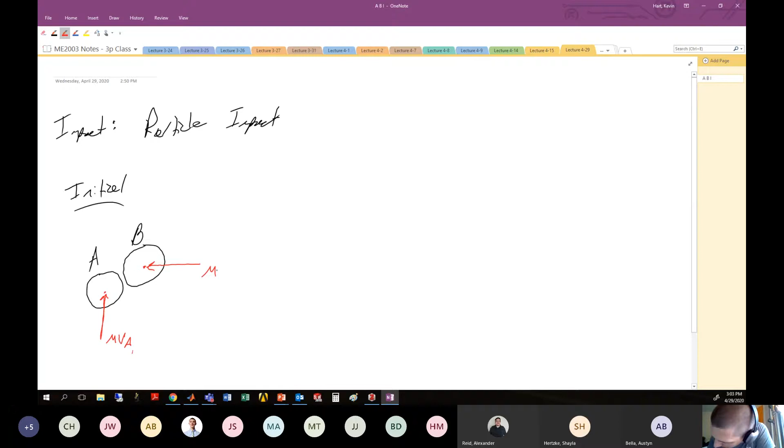Specifically, we were looking at particle impact to kind of motivate our discussion. And remember, the general setup was something like we had some initial conditions where puck A was hitting puck B. Here's puck A, here's puck B, and they're going to strike each other. Let's say this guy is moving here with M V B1, and this guy's moving here with something like M V A1. They're going to strike each other.

We had some definitions for some vocabulary that we're going to use to describe this impact, namely that we have this normal to the point of impact here, which we call the line of impact, or LOI for short. And then 90 degrees from that, we had this other direction, which is the tangential direction, sometimes given little t. We define some unit vectors along that general direction. So if the point of impact is right there at that heavy dot, then we have a unit vector along the normal direction, which is E hat n, and a unit vector along the tangential direction, which is E hat t.

All right, so this is some general definitions of what's happening when these two objects are about to collide. Then we have some impulses which occur. If we're looking at the system as a whole, so puck A and puck B, then we're not going to see any external forces, because whatever forces are transferred between the two pucks at this point of impact is going to be internal to the system. So you see nothing, nothing.

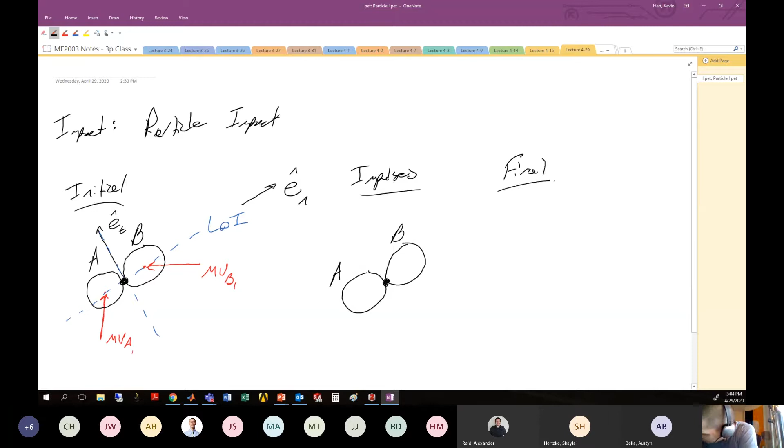And then your final momentum is they've struck each other, and now they're moving away. They had a brief stint, a brief relationship, short and fleeting, where now they've rebounded off each other and have some new momentum terms. So here this is something like M V A2. And after this guy strikes, maybe this guy is moving now this direction with something like M V B2 after it's struck that particular guy.

All right, so we talked about this general situation, and this looks a lot like an impulse momentum diagram. We used this impulse momentum diagram to look at conservation of momentum in the E hat T and the E hat N directions. When we did that, we came up with 4 different equations.

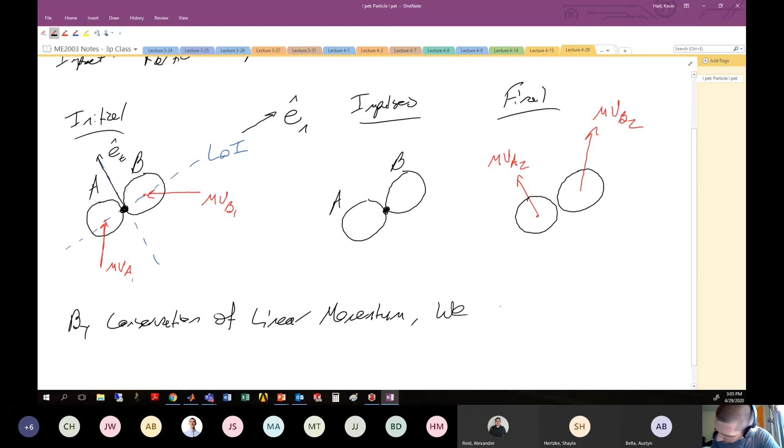So, by conservation of linear momentum, we saw mathematically we had these 4 equations which end up being important for us: that the velocity of puck A, state number 1, specifically in the tangential direction, is conserved. So whatever it is coming in, tangential direction, it's the same coming out. This was for us equation number 1.

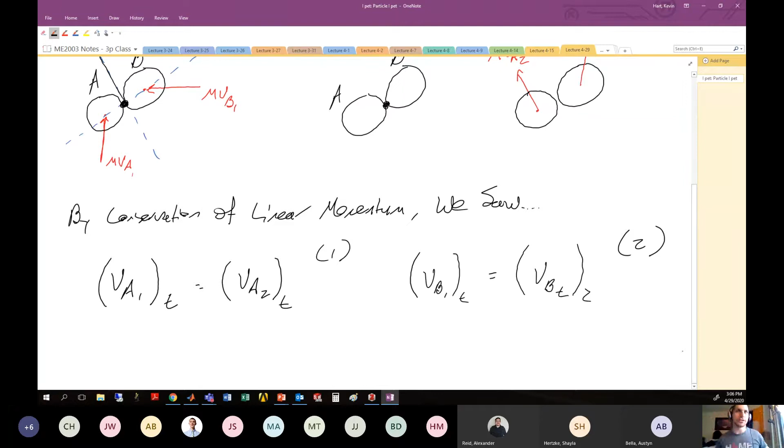Same thing with the velocity of puck B, state number 1, tangential direction. Whatever it is in the tangential direction going in has to be the same in the tangential direction going out. This here was equation number 2. This comes from conservation of momentum of each individual particle in the tangential direction, since the impulses on these particles are only in the normal direction, the tangential momentum must be conserved.

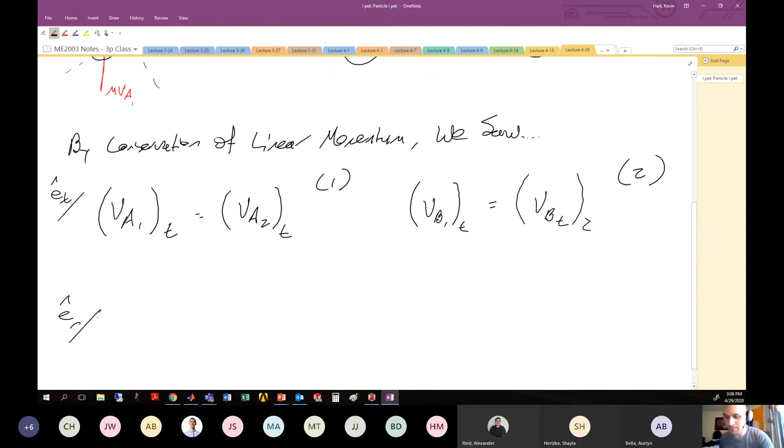So this is specifically conservation of momentum in the normal (E hat N) direction. For E hat N, we looked at the system as a whole and said that the system in the normal direction must conserve momentum. That led us to the following equation: the mass of puck A times the velocity of puck A, state 1, plus the mass of puck B times the velocity of puck B, state 1, equals the mass of puck A times the velocity of puck A in state 2, plus the mass of puck B times the velocity of puck B, state 2. All of this in the normal direction.

That's a funky looking M, looks like a drunken M. Okay, that's a little better. So this was equation 3 for us. And then the fourth comes from conservation of energy.

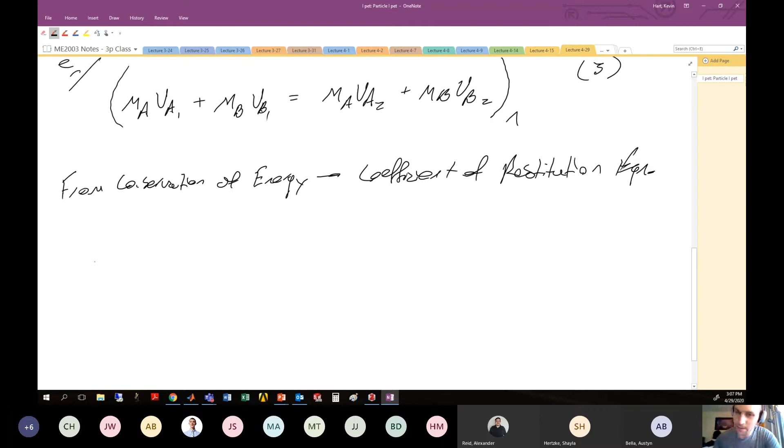We have the coefficient of restitution equation, and for coefficient of restitution we use the variable little e. We write the equation so that the velocity of puck B, state 2, in the normal direction, minus the velocity of puck A, state 2, in the normal direction, is equal to the coefficient of restitution times the velocity of A, state 1, normal direction, minus the velocity of B, state 1, normal direction. This is equation number 4, and it comes from conservation of energy. We know that this coefficient of restitution e ranges in value from 0 to 1.

Okay, and these four equations were specifically for particle motion with oblique central impact.

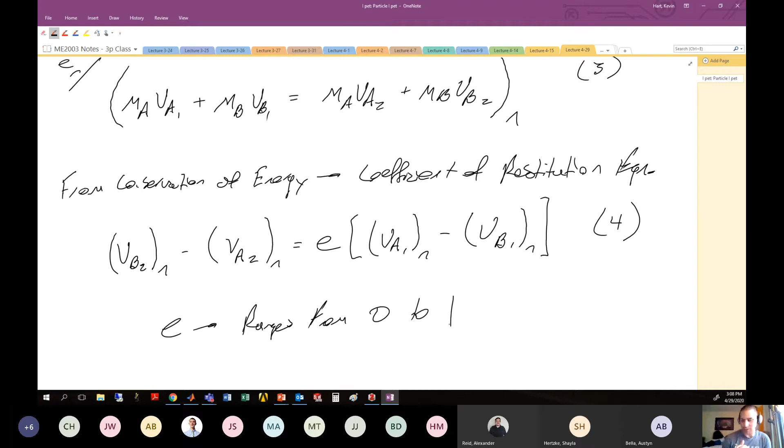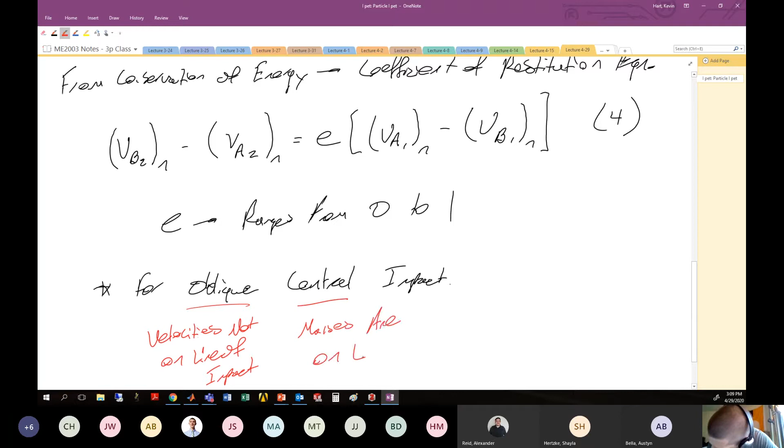And we made some definitions for what it means to be an oblique impact: that is, the velocity is not on the line of impact. And central means that the masses are on the line of impact. So when we talk about particle collisions, which is what we just drew, the masses are always on the line of impact because the mass is this tiny infinitesimal piece. So the mass must always be at the line of impact because it's the center of gravity - there's nowhere else for the mass to possibly be.

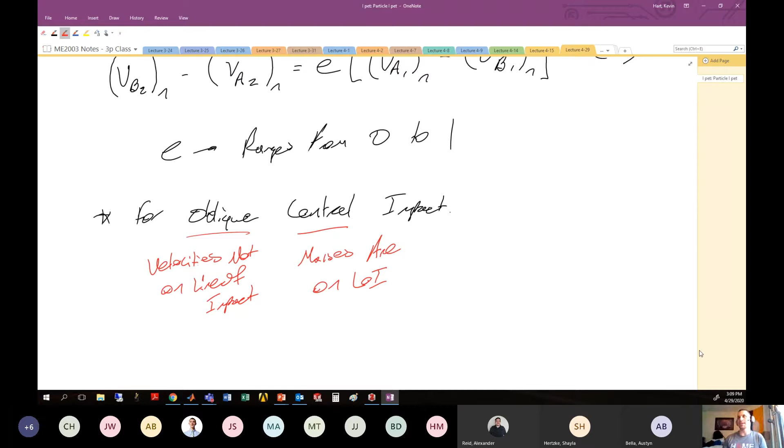Oblique impact is, again, when the velocity is not necessarily in the line of impact, which we drew in this figure here. We see that this particular velocity is not on the line of impact. So this is an oblique impact.

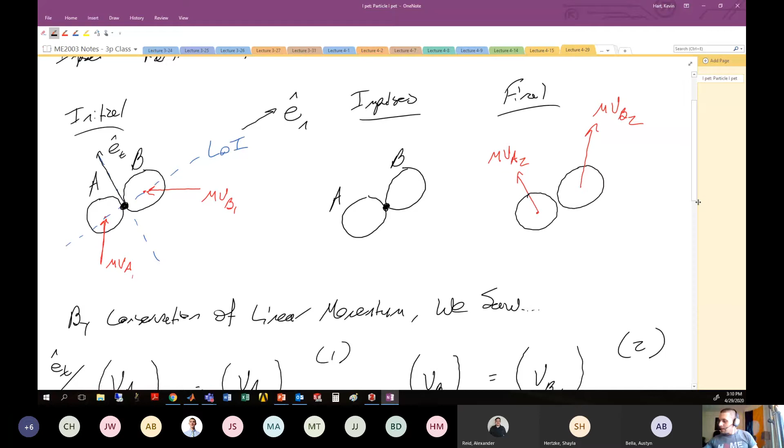Now, that's all good and great. What do we do when we have to go to rigid bodies? Well, again, with rigid bodies you're not always going to have this central impact - you're going to possibly have eccentric impact, and I'd say most of the time you have eccentric impact. So we have to deal with that.

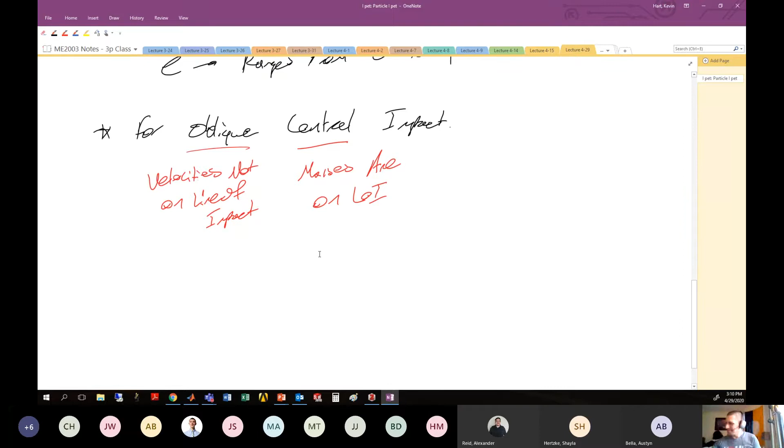All right, can you deal with that? Okay, anybody know the movie? If you know the movie, I'll be very impressed. Can you deal with that? Okay, 10 million bonus points of nothingness to whoever knows that movie quote. Can you deal with that?

All right, we have to deal with moving from particle interactions to rigid body interactions. So now let's investigate rigid body collisions with eccentric impact. Looks like somebody has a guess.

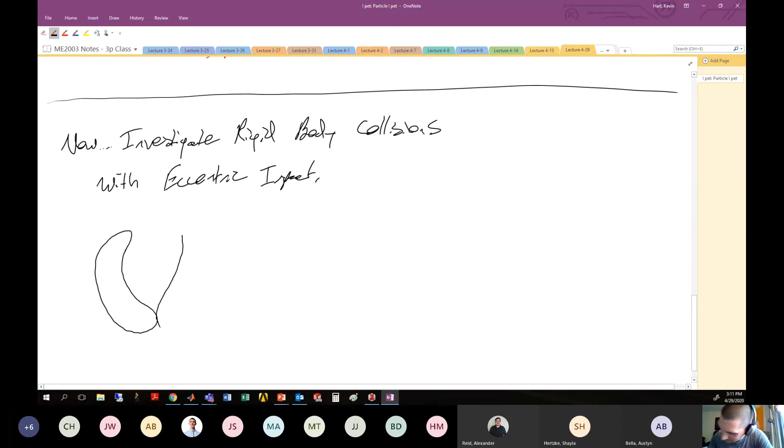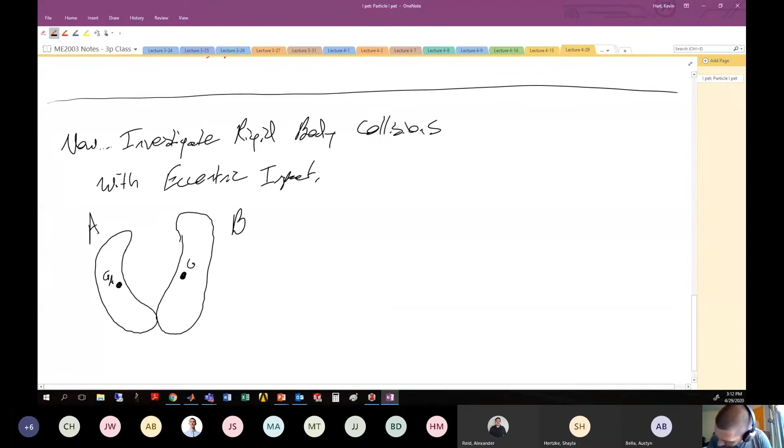All right, so we're going to investigate rigid body collisions with eccentric impact. What we should have in mind is some rigid bodies with some random generic shape. Let's say we have a peanut-shaped rigid body, maybe it looks like that, and it's going to collide with some other peanut-shaped rigid body that looks something like this. So here's rigid body A, here's rigid body B. This guy has a center of gravity - it's probably not going to be there, the center of gravity might be something more along the lines of there. And here's the center of gravity of B. So let's call this GA, and we'll call this GB. They're going to collide down here at some point that we'll note, and we'll call this point D.

So two bodies, A and B, colliding at D with eccentric impact.

All right, so it's eccentric because the centers of masses of those individual objects are not along the line of impact. So if these guys are going to collide and hit each other, remember the line of impact is like normal to that collision site. So the line of impact here is something like this. Notice that the center of gravity of each of those objects is not necessarily on that line of impact. So we got issues.

And just, I'm talking dynamic issues here. We all have our own issues. Okay, come on, I'm going crazy here, so obviously I have issues.

All right, so the collision has got this line of impact, and we see that neither of the centers of gravity are along that line of impact. So when they strike each other, you're going to impart motion in this angular sense because there's going to be resulting velocities at the line of impact after the collision, and they're not necessarily at the center of gravity. So you're going to impart rotation to each one of these objects, and that kind of complicates the matter.

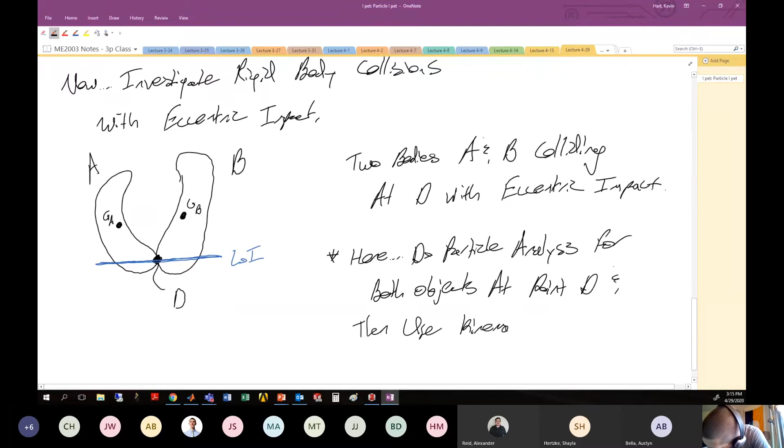So the way we deal with eccentric impact is: here, we do particle analysis for both objects at point D, and then use kinematics to determine other velocities on the body, including potential angular velocities. So velocities here, I'm including both linear and angular components.

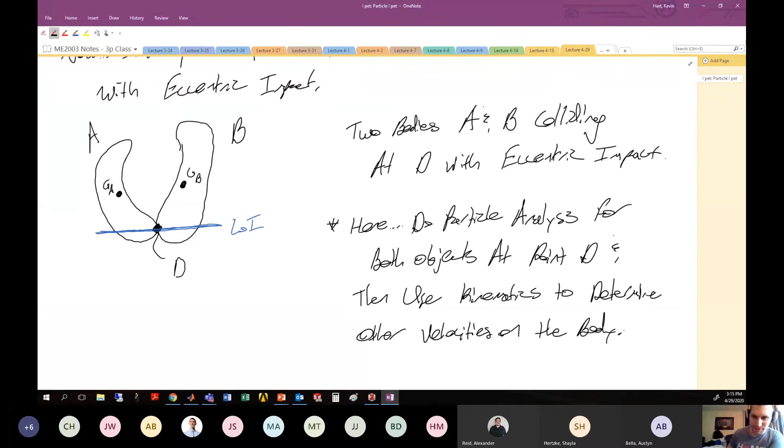All right, can you deal with that? So enough jibber jabber, enough yakety yak. Let's do it. Let's do an example problem. Yakety yak, don't talk back. So let's look at an example problem.

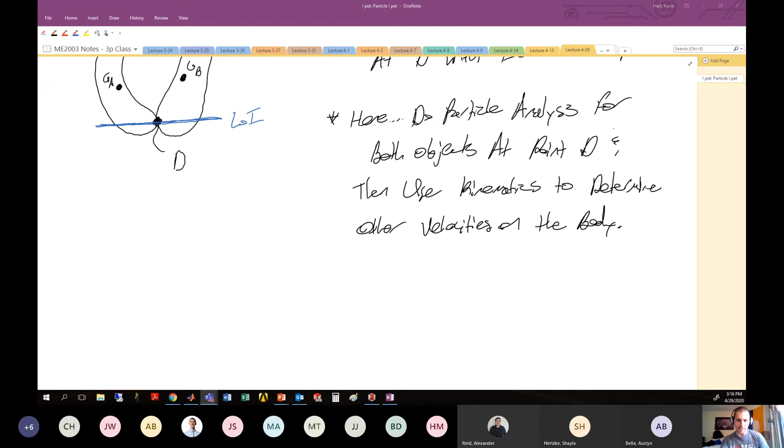This example problem is very similar to problem number 4 that you have on your homework. Except here we're sort of vertical instead of horizontal, and we've got a different location for the pin. But the general idea is the same.

A 2 kilogram sphere moves to the right at 5 meters per second, and it strikes the bottom end of this rod, which has a mass of 8 kilograms, and the coefficient of restitution between the sphere and the rod is 0.8. We want to determine the angular velocity of the rod and the velocity of the sphere immediately after this impact has occurred. This is an eccentric impact because the center of gravity of the sphere and the center of gravity of the rod are not both along the line of impact. So there's going to be resulting angular velocities. We have to figure out what that is, and resulting post velocity of the sphere, which is going to be different than the velocity of the rod where the sphere strikes it. So let's look at this example.

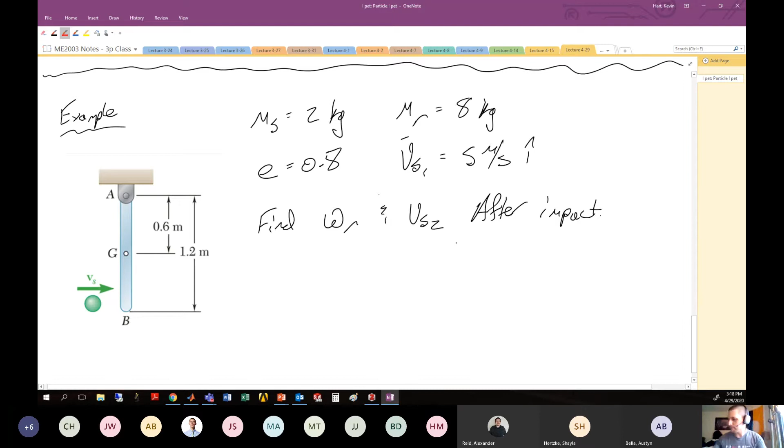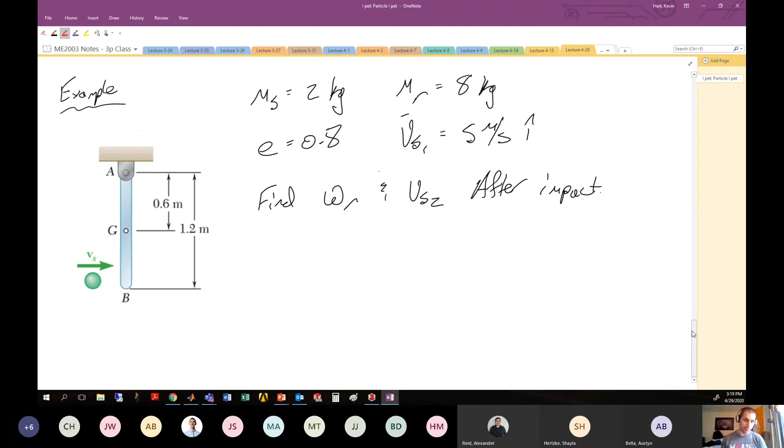So this is a conservation of momentum problem. And with conservation of momentum problems, we're going to attack them by doing conservation of momentum of our particular problem with our sort of momentum diagrams. So we will do an initial momentum. We're going to have some impact or some impulses.

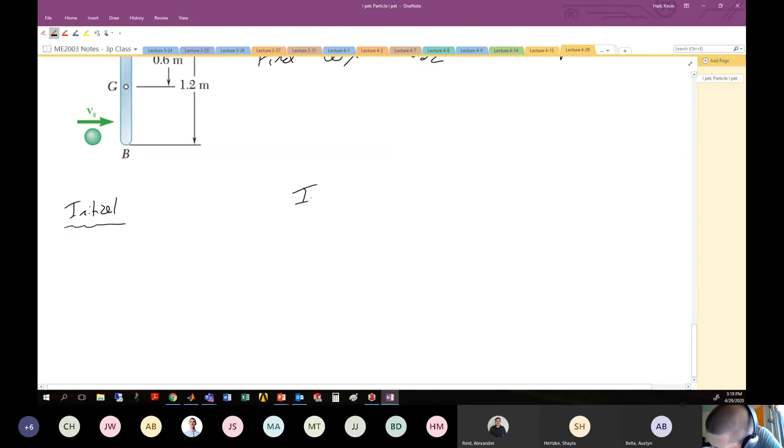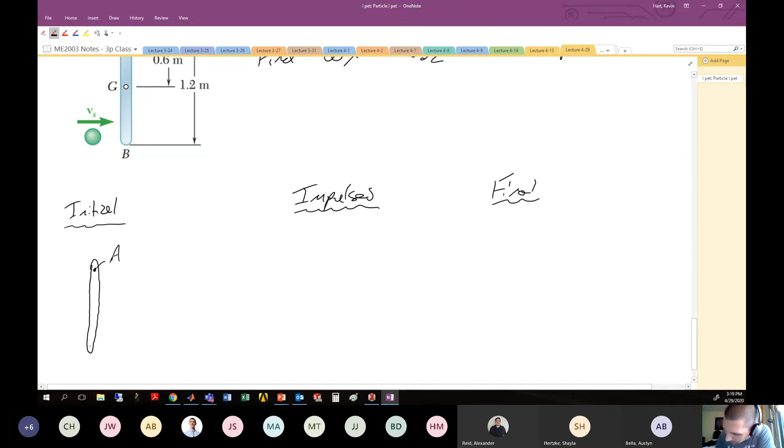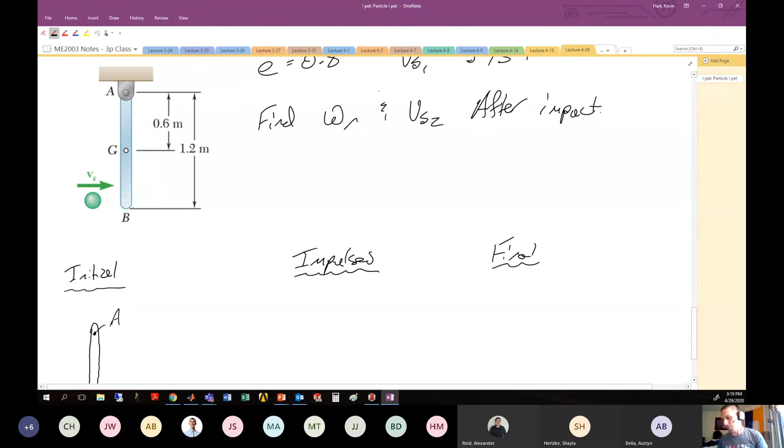And then we have a final condition. So initially, here is our rod. Up here we have point A, and down here we have point B. It looks a little bit weird in this figure, like the velocity is hitting some random point up here, but we're supposed to assume that this velocity is impingent on the bottom of the rod here at point B. I don't think they did a very good job with this figure.

But if that's the case, we have this linear momentum coming in, which is the mass of the sphere times the velocity of the sphere in state number 1. Initially we're told the rod is at rest, so the only thing coming in here is the mass of the sphere times the velocity of the sphere in state number 1.

Maybe it's worth drawing both objects just to make sure we're crystal clear about what's going on here. So here's the sphere coming in and it's striking B, with mass of the sphere and velocity of the sphere in state number 1. Just to be crystal clear that there's two objects hitting each other, and object number 1, the sphere, is the one that's moving.

The impulses here - here's again this point A. Here's point A, and here's the sphere, which is striking the rod. Yes, there are going to be forces transferred between the sphere and the rod. But since we're considering this as a system, the forces transferred between the sphere and the rod are going to be contained within the system. So these are not external forces because they're contained within the two objects that we have.

So the only impulses that we have in this particular problem are the impulses that occur from the pin at A. Here's the integral of the force at A in the y direction over time, and here's the impulse associated with the force at A in the x direction over time. All right, so get your facts straight.

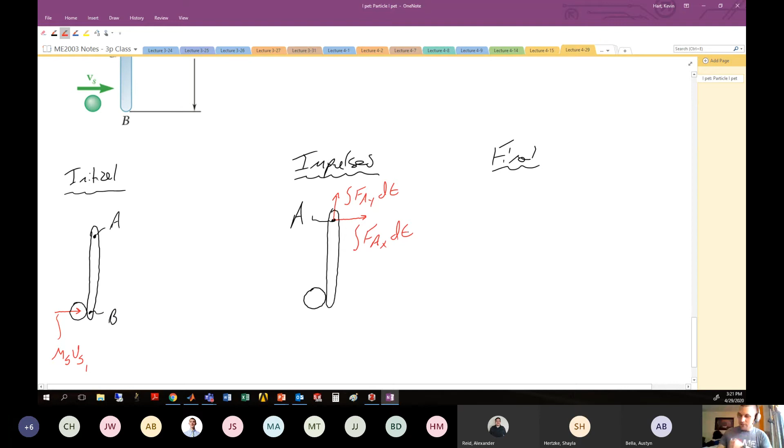Final momentum. Here's point A. I'm going to draw in here now the center of gravity, which is point G for the rod. And also we have our sphere that's still hanging out here at the bottom, but let's say it's right about to, or has just released from, the rod.

So in state number 2 now, obviously the sphere hitting the rod is going to impart some motion to the rod. So the rod is just about to begin moving. And so that motion of the rod is going to excite some linear momentum at the center of gravity and also some angular velocity at the center of gravity. So we have some components here of the mass of the rod, the velocity of the rod in state number 2, specifically at the center of gravity, G.

We'll also have some angular velocity that is occurring, so let's just draw it in the general positive direction. Here we have I, G, omega. And this is something that we're interested in finding, this omega value - the angular velocity of the rod after the sphere has struck the rod.

The sphere will also have some residual velocity, yet we don't necessarily know if the sphere is going to hit this rod and bounce back, or if it's going to hit the rod and keep going after it swings the rod up. We don't really know how the sphere is going to move. But the way we handle this is we draw this velocity in state number 2 with a general positive sense, and we'll let the math take us there.

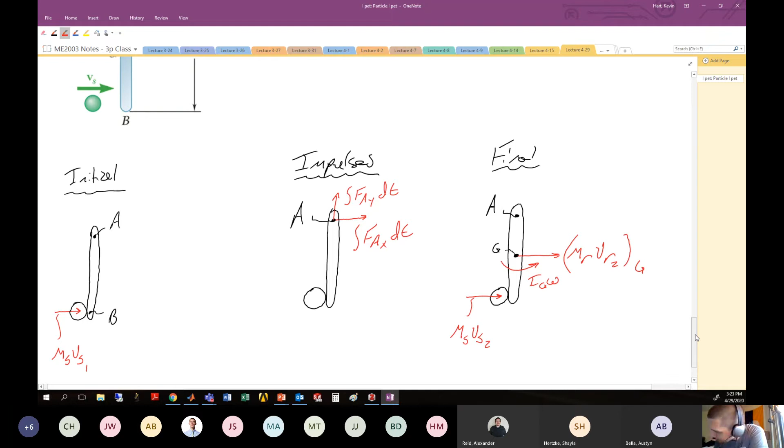Okie diddly dokio. Let's dance.

So the way we're going to attack this problem is to say that conservation of momentum is conserved both linearly and angularly. You could do a conservation of linear momentum in y and figure out that there's not really going to be anything happening here. You could do a conservation of linear momentum in x and you're not going to learn a lot of information. The only thing we really need to worry about here is the conservation of angular momentum about A. So let's look at that.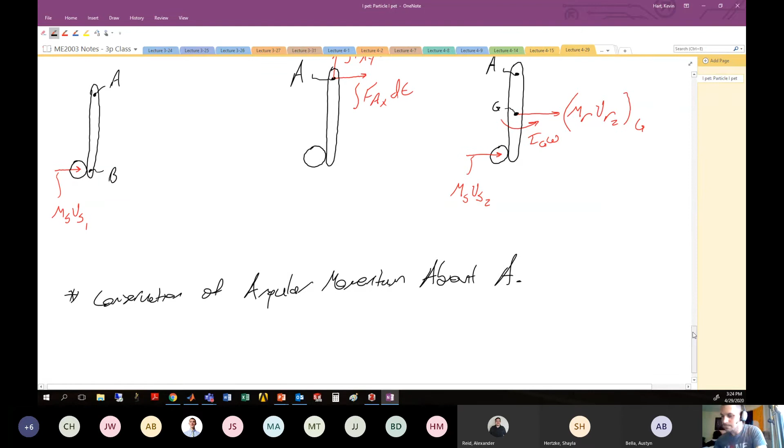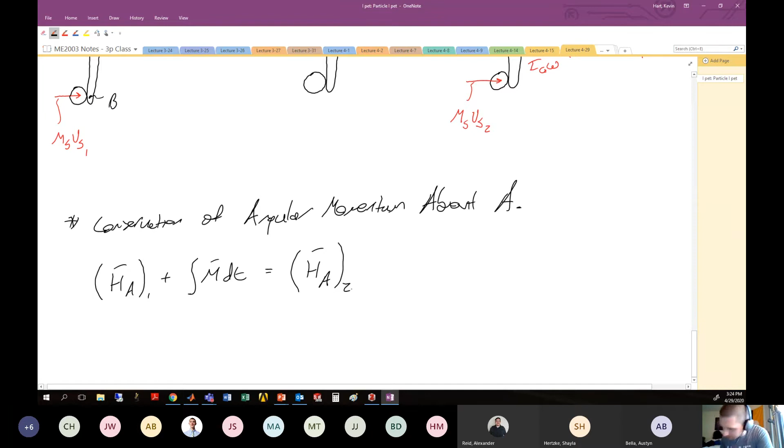Remember our general equation, always like to write the general equation: the angular momentum about A, position number 1, plus the impulsive moments integrated over time, is equal to the angular momentum about point A, state number 2. Remember, that's our general equation. It's where we always start.

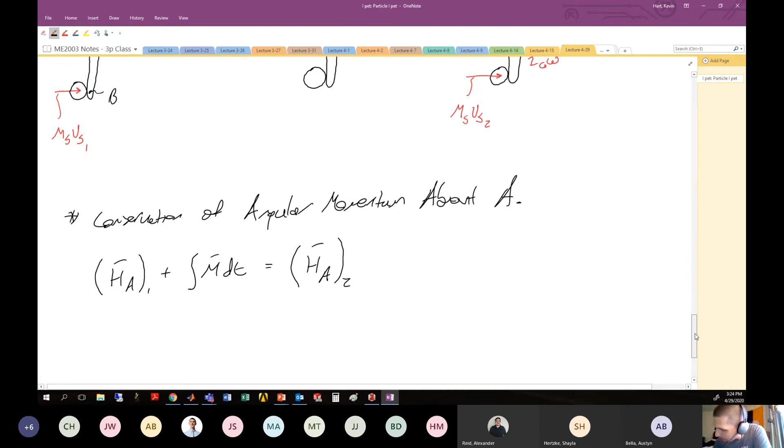Vector form, yay mathematics. So let's check out what's going on with the angular momentum about point A in state number 1. Here is point A in state number 1, and we're going to have some angular momentum component about point A that comes up from this linear momentum of the sphere.

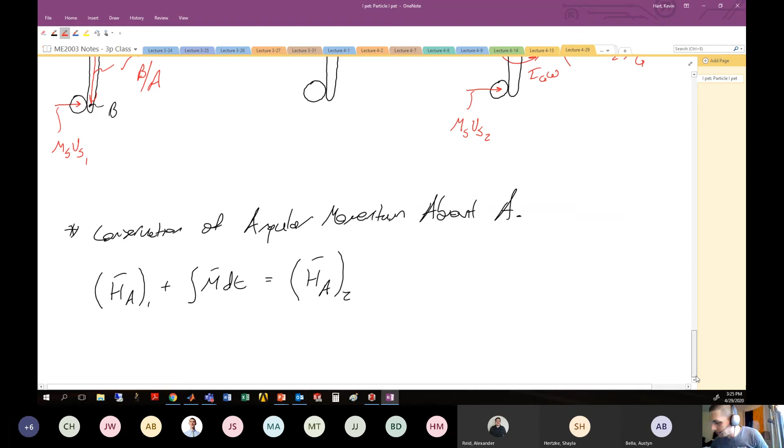Here we've got a position vector that locates B from A. So that position vector crossed with the linear momentum vector ms vs1 is going to give us this angular momentum about point A. We can generally see that that cross product is going to be positive, but let's write it down and make our way through that calculation.

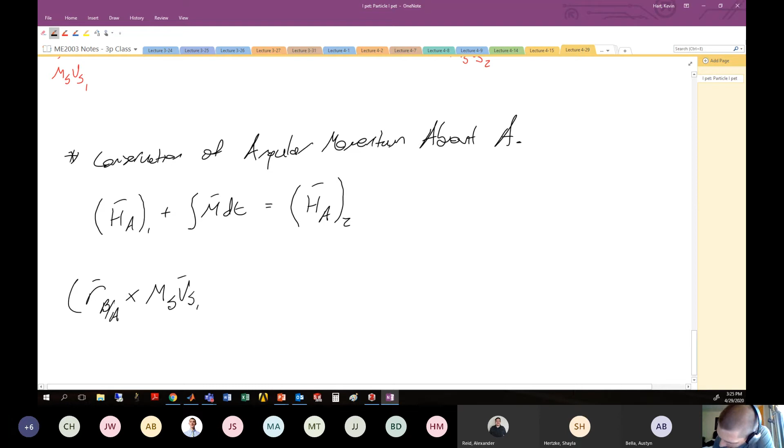So here we're going to have something like the position vector which locates B from A, crossed with the linear momentum of the sphere, which is ms vs1. That's the only angular momentum component we have to worry about in our initial state.

Our impulses now, we have to worry about the moment impulses about point A. And since both of these linear impulses travel through point A, there is no moment arm, so we have no moment impulses about point A. So here, plus a big old 0. I like when I get to write 0 on the paper because that's easy, so easy a caveman could do it. All right, I can add 0 to something.

It's nice. All right, now my angular momentum in state number 2. I've got a linear component here with position vector locating that guy here. So that's going to pop up.

This is the position vector which locates G from A, crossed with the mass of the rod times the velocity of the rod in state number 2. This is specifically at the center of gravity, but hopefully we all kind of understand that.

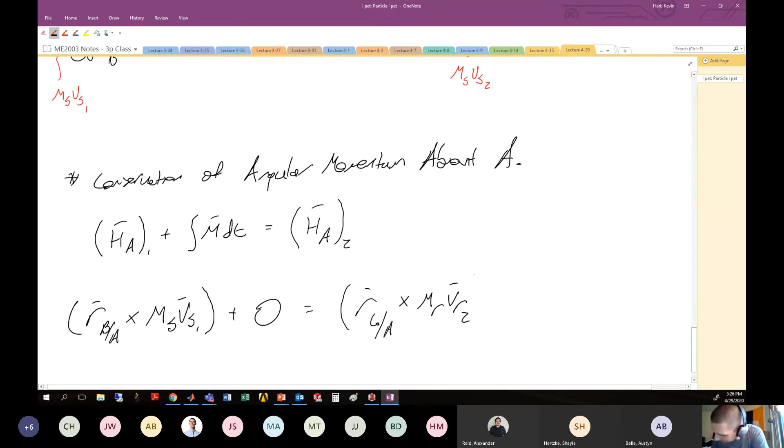I'm going to add to that the component that comes from the rod now beginning to spin, this IG omega.

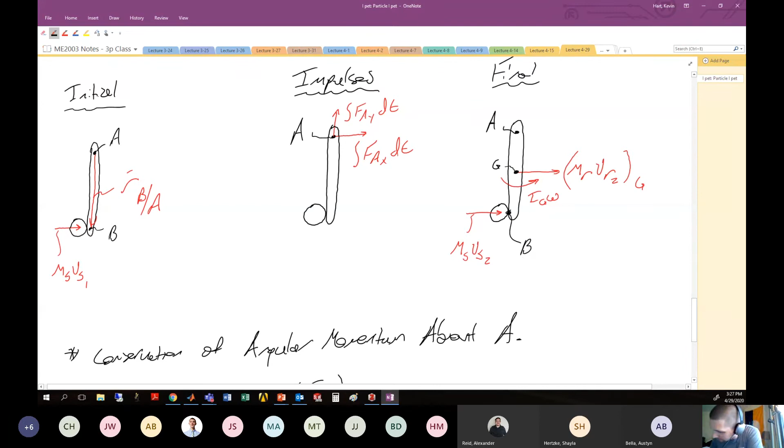Plus the last bit, which is here, the mass of the sphere times the velocity of the sphere. This has some linear momentum, and again, it's located down here at what is point B. Remember, this is B down here.

So we have a position vector which locates B from A crossed with this linear momentum component. It's going to be a general positive sense. So here is just the position vector which locates B from A crossed with the mass of the sphere times the velocity of the sphere, state number 2.

How are we doing? Any questions? Can you deal with that? All right.

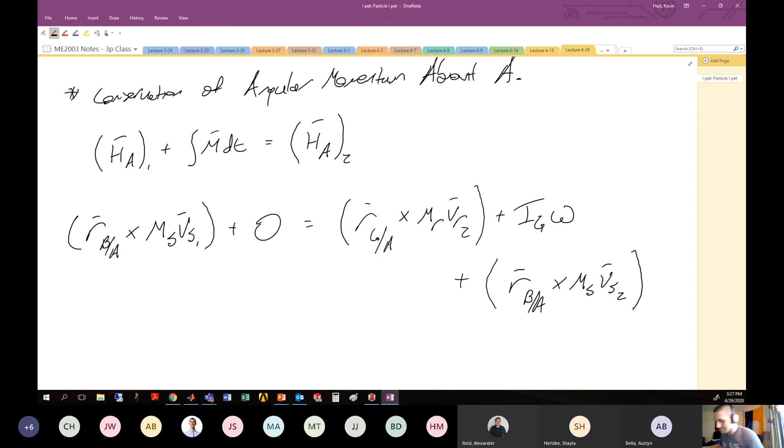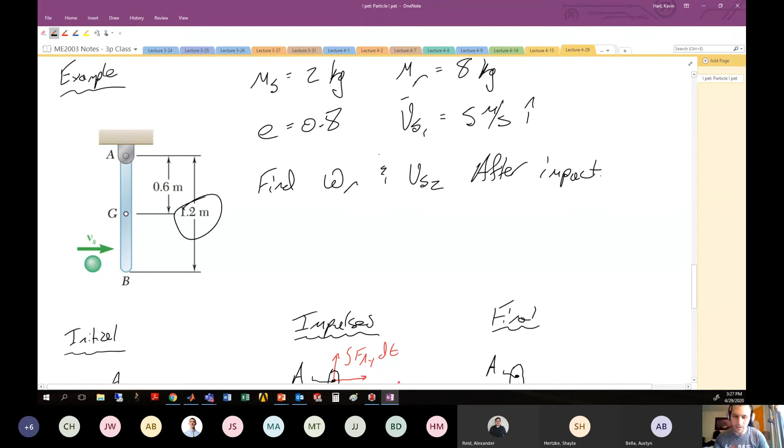So let's put some numbers to all these guys now. We generally know that the rod is 1.2 meters long. So if we come back up here and look, the rod is 1.2 meters long, so the position vector which locates B from A is going to be 1.2 meters. And then we know that the half length is 0.6 meters, so the position vector which locates G from A is going to be 0.6.

So if we put some numbers in here and use our right-hand rule for the cross products, we can simplify this guy. Position vector which locates B from A, we know that to be 1.2 meters, multiplied by the mass of the sphere, given as 2 kilograms, multiplied by the initial velocity of the sphere, given in the problem, 5 meters per second.

All right, so that is my left-hand side of the equation, my initial momentum components. This is going to create for us some final angular momentum, which has contributions from all of these things, as you see. So the position vector which locates G from A, this is going to be 0.6 meters, the half length from G to A, multiplied by the mass of the rod, 8 kilograms, times the velocity of the rod in state number 2.

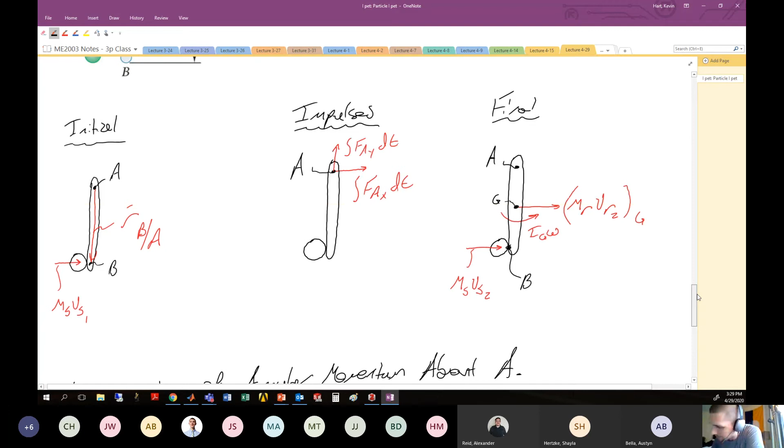We can use a kinematic relationship here between the velocity of the rod at the center of gravity in state number 2 and the angular velocity. It's 0.6 times omega. So remember, I have fixed axis rotation about A, so the velocity at the center of gravity of G equals 0.6 times omega. All right, that's the substitution I have just made.

I'm going to add to this, I'm going to add omega.

Mass moment of inertia for a slender rod is 1/12 ml squared. The mass of the rod, 8 kilograms, times the length of the rod, 1.2 meters, squared, multiplied by omega.

And finally, this last term here is the term for the angular momentum about point A that the sphere provides after it impacts. So here the position vector to B from A, again, is 1.2 meters, multiplied by the mass of the sphere, 2 kilograms, multiplied by the velocity of the sphere in state number 2.

Okay, got to be careful here. The velocity of the sphere in state number 2, since the velocity is rebounding off of this rod, does not have a kinematic relationship with the rod any longer because it is rebounding off of the rod. It doesn't stick to the rod. So you can't write something like the velocity of the sphere after impact is 1.2 times omega. That ain't right because it's not stuck to the rod anymore.

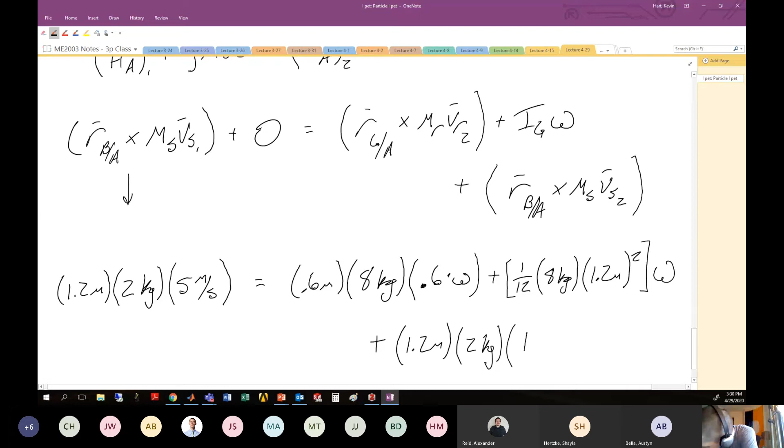So we have to have some generic value for the velocity of the sphere in state number 2. I'll write here, this is the magnitude of the velocity of the sphere in state number 2. And I'll make a very specific note here that because the sphere rebounds off of the rod, it doesn't have this kinematic relationship with the rod anymore.

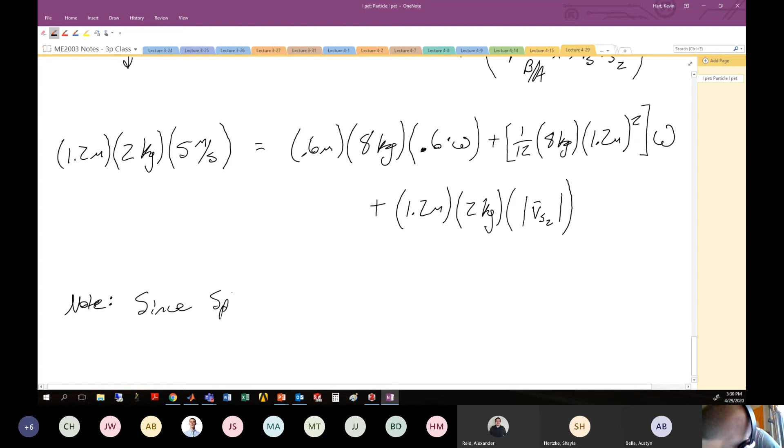It is not the case that the magnitude of the velocity of the sphere in state number 2 is equal to r omega. That is not the case. Or this might be something like 1.2 omega. That is not true. If you write that on your paper, it's incorrect, because it doesn't stick to the rod. It bounces off. We don't have this sort of perfectly plastic impact anymore.

All right, so we simplify above with both omega and the magnitude of the velocity of the sphere in state 2 as unknowns.

All right, if we do that, we can look back at this equation up here. The unknowns that we have are the angular velocity of the rod after impact, this omega, and the velocity of the sphere after it has impacted the rod.

So we can simplify this and write this after doing some algebra. This is going to be something like 12 Newton seconds equal to the contributions here, 2.88 omega, plus the contribution from the next component, 0.96 omega. This is an omega, or W as my students sometimes like to say.

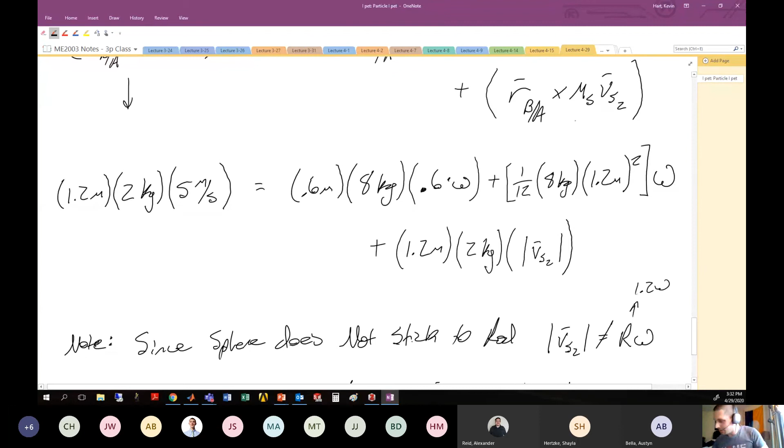All right, so that comes from this portion, which is the angular velocity of the rod itself. And I'm going to add to this last contribution here, which will look something like 2.4 times the magnitude of the velocity of the sphere in state number 2. All right, let's call this equation 1.

And we see we have in this equation the angular velocity for the rod, which is something we're after, and the linear velocity of the sphere after it hits the rod, which is also something we're after. So we need more information.

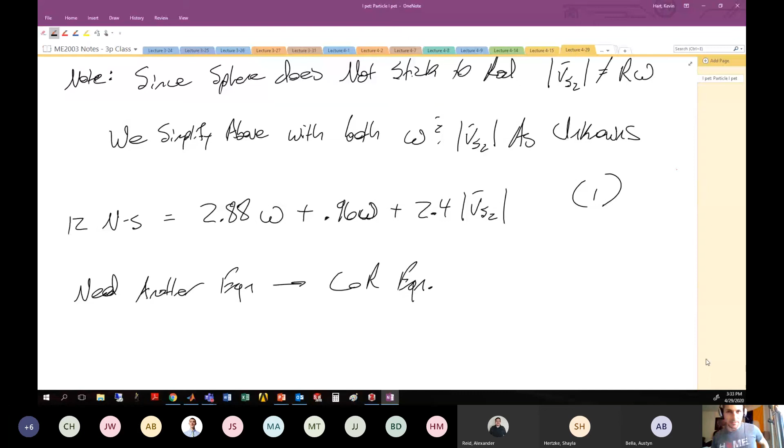And that equation that we're going to use is the coefficient of restitution equation. All right, so we've done our conservation of momentum. Now we need to bring in conservation of energy through the coefficient of restitution equation. Let's remind ourselves what that general equation looks like.

That general equation is that the velocity of, in this case, I'll denote the rod and the sphere so we can be very clear about this. The velocity of the rod, state number 2, minus the velocity of the sphere in state number 2, equals the coefficient of restitution, E, multiplied by the velocity of the sphere, state number 1, minus velocity of the rod, state number 1. And this specifically applies at B. This is very important.

So B is the location on the rod where the sphere hits the rod. So we must do our particle analysis right on the particles where this is occurring. So it's specifically the case that we're looking at the velocity before and after impact of both the rod and the sphere right where they hit each other. So let's define some of these things.

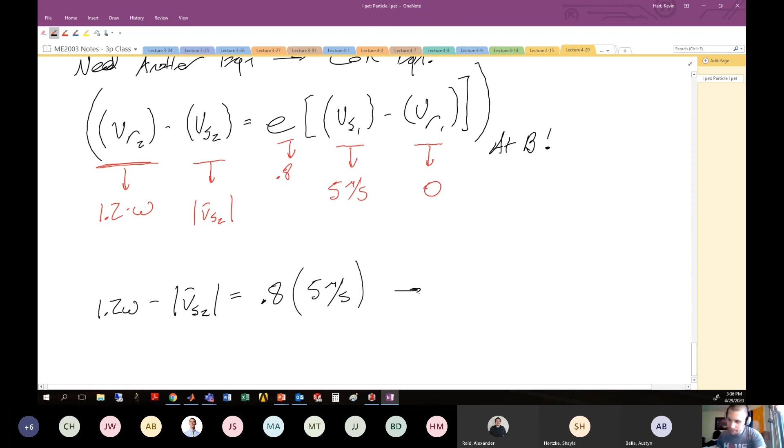Put this here, then we have 1.2 omega minus the magnitude of the velocity of the sphere, state number 2, equals the coefficient of restitution, 0.8, multiplied by this 5 meters per second for the velocity of the sphere, state number 1. We can rearrange this and solve for one of the variables. Let's solve for the velocity of the sphere. After we simplify, it's going to be something like 1.2 omega minus 4. Let's call this equation 2.

So now we have 2 equations and 2 unknowns. The conservation of momentum equation, angular momentum conserved about point A, gave us these 2 unknowns, omega and the sphere velocity state 2. Then our conservation of energy through the coefficient of restitution equation gives us another relation between angular velocity of the rod and the velocity of the sphere after impact.

So we'll plug 2 into 1. Do the hokey pokey, turn yourself around, and you get something like 12 is equal to 3.84 omega plus 2.4 times the velocity of the sphere, which we know is 1.2 omega minus 4. So this is again plugging equation 2 back into equation 1. This is just algebra.

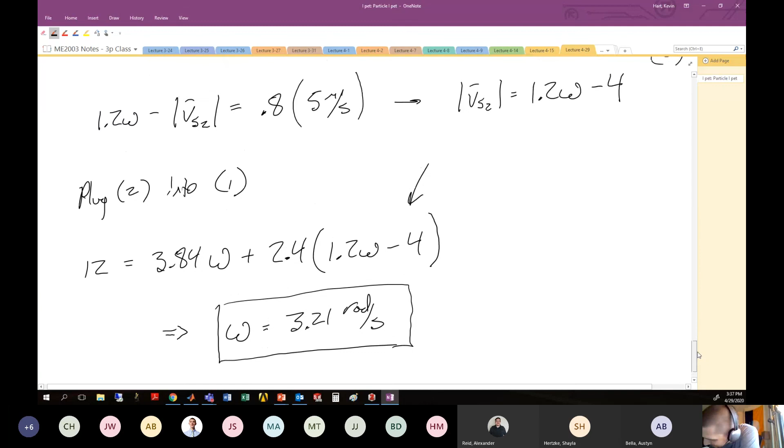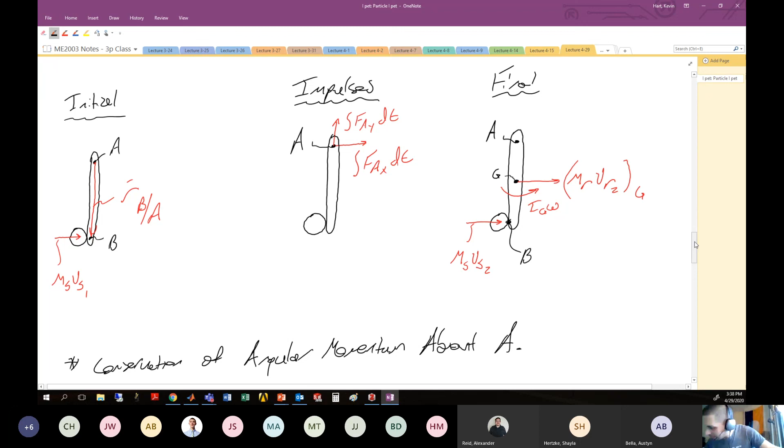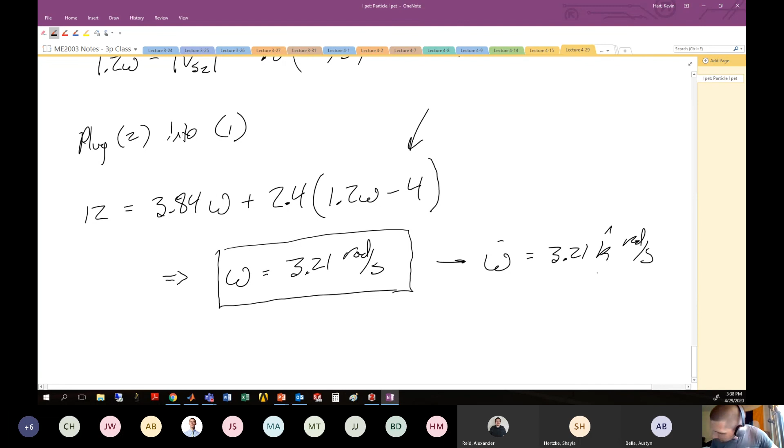We can find here that the angular velocity, after working through this, is going to be 3.21 radians per second. We have discovered a positive value for angular velocity in this problem. So the positive value indicates that when we originally drew our angular momentum vector with this general positive sense, we did in fact draw it in the right direction. The math confirms physically that omega is positive in the direction we drew, which is what we expect. So 3.21 radians per second, or in vector form, 3.21 k hat radians per second.

We can plug this back into equation 2 to determine the magnitude of the velocity of the sphere, which is going to be 1.2 times omega, so 1.2 times 3.21 radians per second, minus 4. We get here that the magnitude of the sphere in state 2, after working through the algebra, is negative 0.148 meters per second.

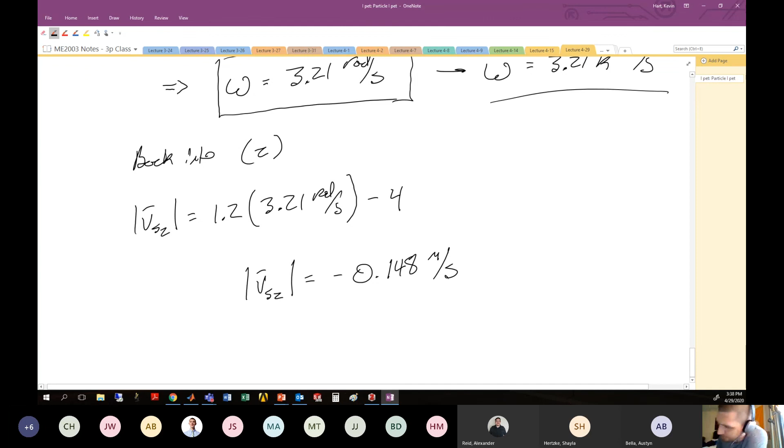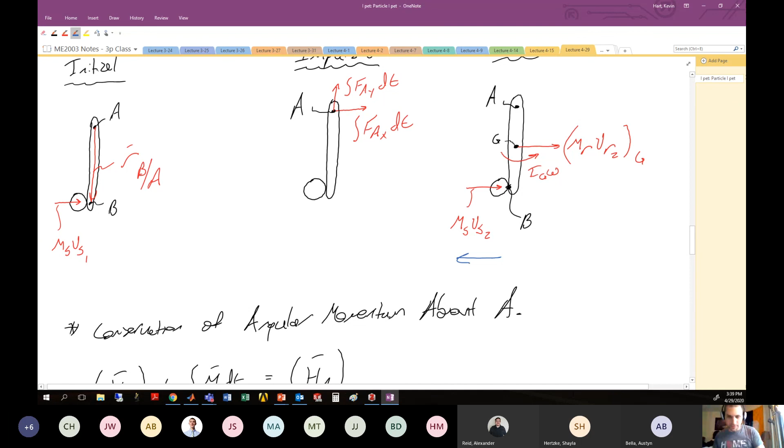What does this mean? Well, the negative value just indicates to us that however we drew the linear momentum of this object in state number 2 was wrong, the wrong direction. We assumed this general positive direction for the linear momentum of the sphere after impact, but we didn't necessarily know that was true. If I've got this plate hanging and some object impinging on it, it could either ricochet backwards or continue to move forward, but maybe slowing down a little. Here we drew it as continuing forward, but that was incorrect. In reality, it's going to bounce back with a very small velocity of negative 0.148 meters per second. So again, just let the math set you free.

All right, let the math take you there. So if we wanted to write this formally, we'd say the velocity of the sphere in state 2 is negative 0.148 i hat meters per second. So it hits this plate and it rebounds backwards.

And that's what she wrote. Can you deal with that?